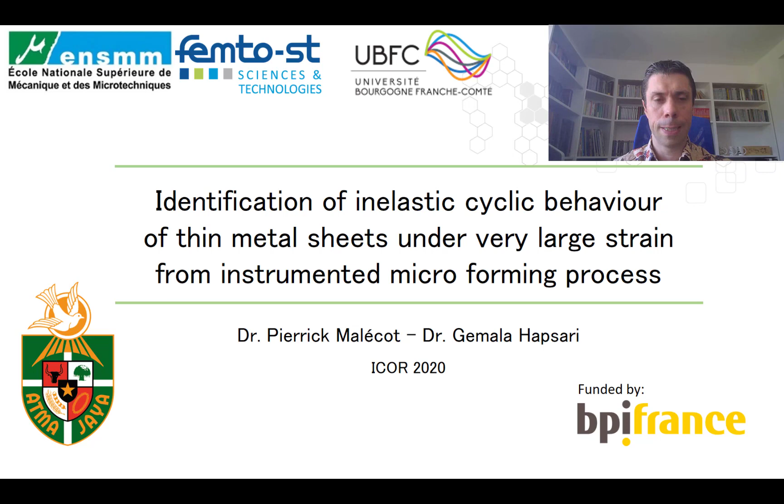Maybe a few words about the place I work in. The school is called ENSMM, the National High School for Mechanics and Microtechnologies. The school was founded in 1902. It's a French engineering school, what we call Grandes Écoles. This year we have around 900 to 1,000 students. It's not a lot for a university, but for an engineering school in France, it's quite big. If you need more information about the school, just check the website.

The research institute is called FEMTO-ST Institute. It was founded in 2004 by the fusion of 5 laboratories. It's a mixed research unit between the National Center for Research, the Engineering School ENSMM, the University of Bourgogne-Franche-Comté, and the University of Technology in Belfort-Montbéliard. Around 800 people actually work in the FEMTO-ST Institute.

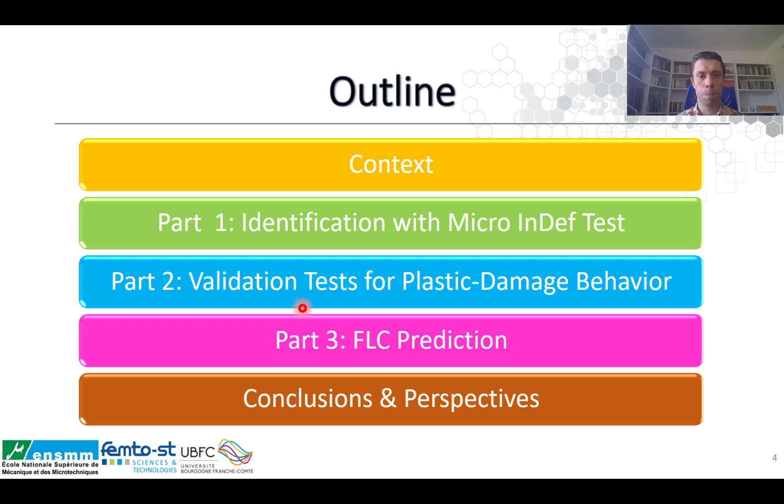This work is the fruit of a research project between 2 laboratories and 6 companies with a budget of nearly 4 million euros. The main goal of this project was to develop a new type of connector which is cost effective and has high performance.

We work on the material characterization aspect, while the other laboratory, GRESPI, works on simulation and process modeling to simulate all the processes used during microconnector manufacturing, such as cutting, bending, forming, welding, etc.

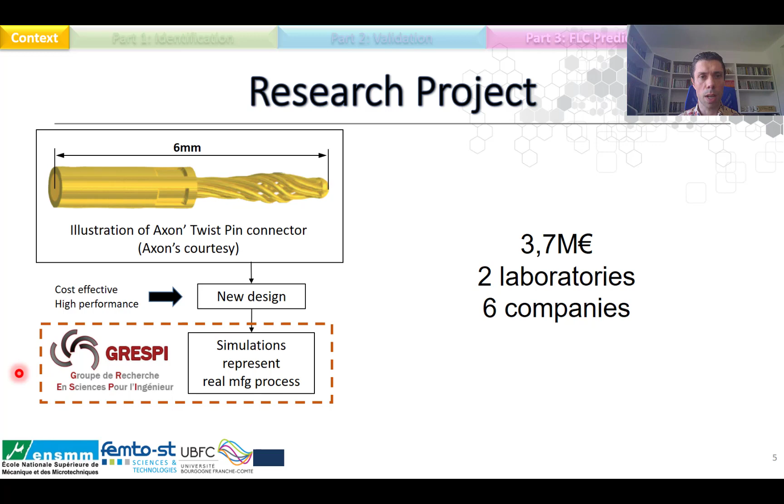As I said before, our work is to supply the suitable material parameters to GRESPI, and these parameters will be used to run process simulations. So we use some experimental tests to identify the material parameters.

Within this work, regarding the material, we have some limitations. We are working only with copper alloy strips, with a thickness of 0.13 millimeters and 15 millimeters width. They will go under very large strain, and we have the phenomenon of out-of-plane solicitations.

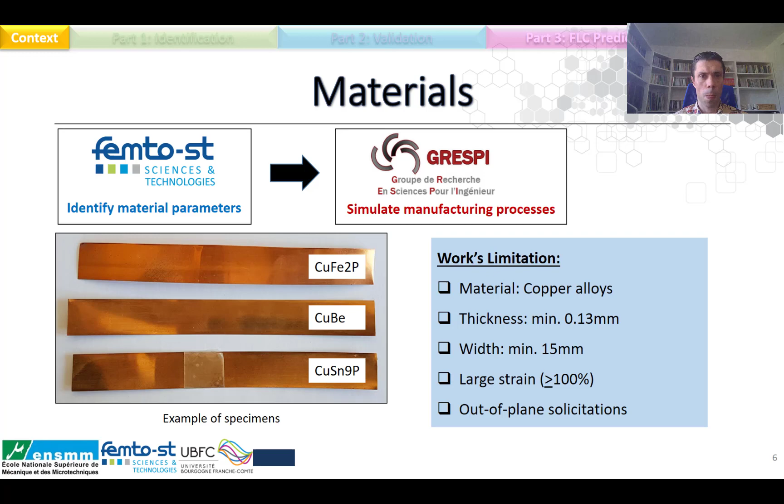As a quick recap of our mission: we have to identify the constitutive law of thin sheet metal adapted for process simulation. To accomplish this, we must face the challenges of establishing characterization methods for mechanical behavior and for formability of thin sheet metal.

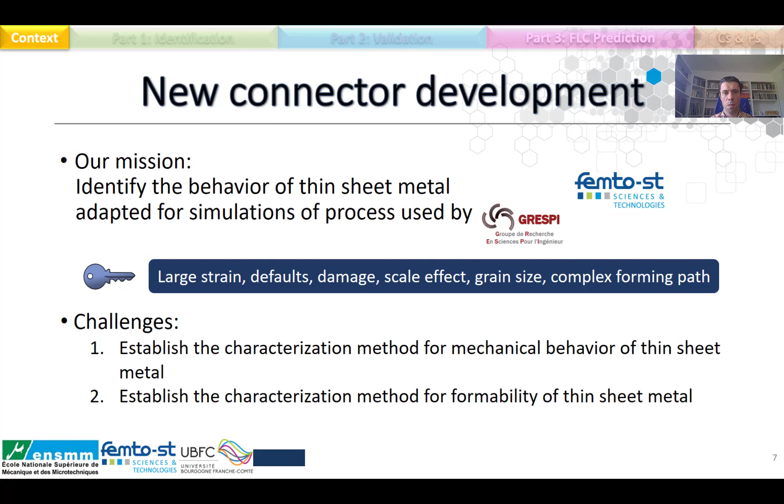Everybody knows that there are already several methods to characterize material. So why do we need to develop a new one? That's the object of the following slides. The most known experimental test is the tensile test.

Tensile tests have two main weaknesses for the work we are trying to do. The first weakness is that tensile tests undergo homogeneous and plane deformation, and the maximum strain for copper alloy is rarely above 50%. This doesn't match the requirements we have for our characterization, which is out-of-plane deformation with maximum strain above 100%.

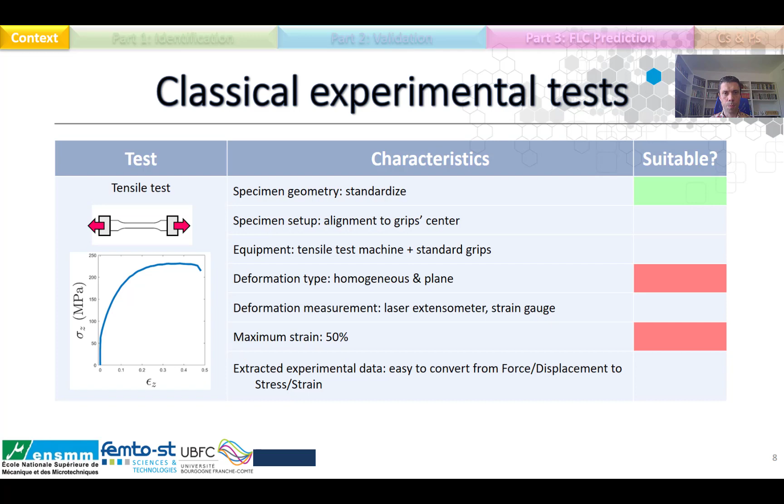We also used some bulging tests, but as our strips are very small, we need to develop a new setup for this experiment. The size is very small, so the sealing will be very hard to obtain to ensure the pressure, and in copper alloys the maximum strain is just around 70%.

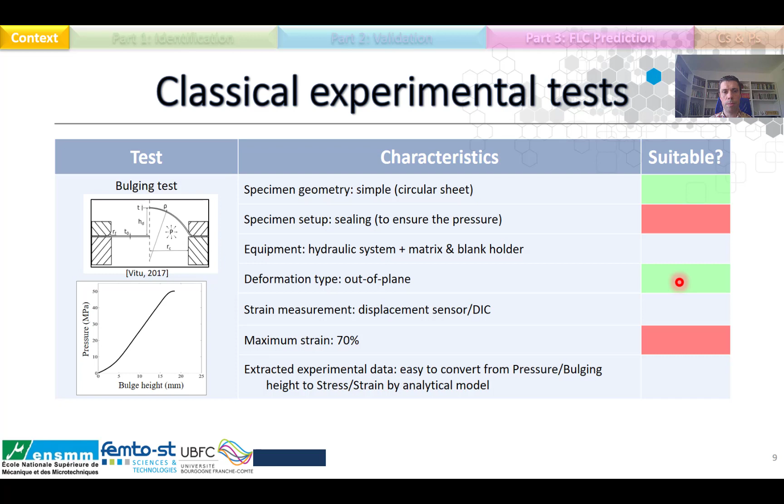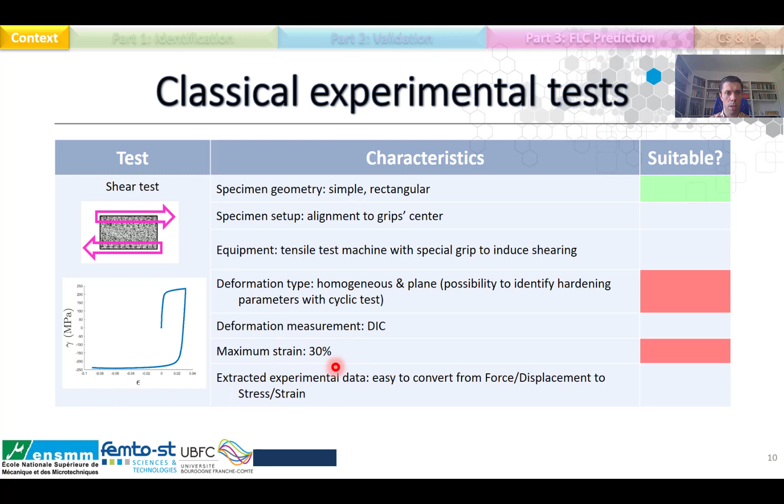So we developed a new type of characterization test. The name of this new characterization test is micro-indef, for micro-incremental deformation test. This test has a lot of advantages. The geometry of the specimen is very simple. We can go under a heterogeneous and out-of-plane deformation type, and the accumulated strain is above 250%, which is very high. So this test matches the requirements of the project.

We can go under out-of-plane test. We can go above 100% deformation. And as the specimen geometry is simple, it's easy to manufacture them in a very small strip.

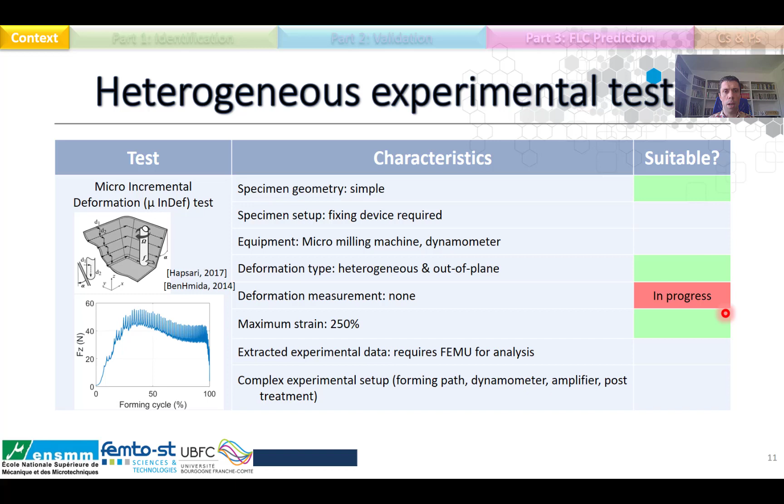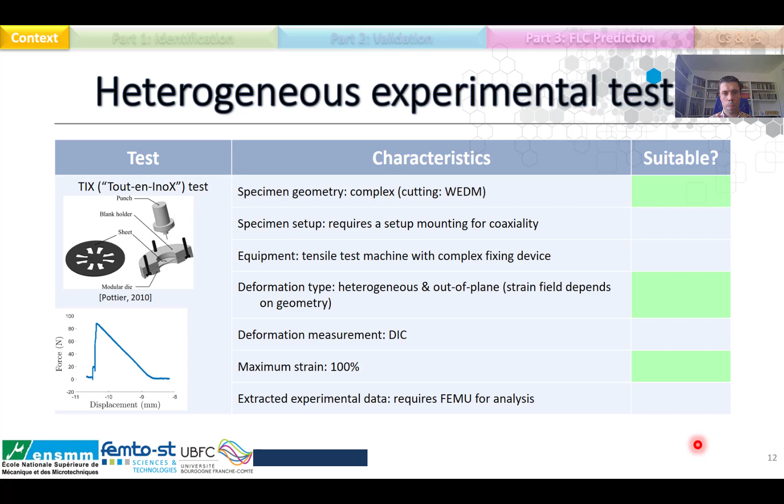So this table sums up all the qualities of the different experimental tests. We can see clearly that micro-indef test and TIX test are capable of answering our needs. So I will firstly present micro-indef test as the characterization test, and later we will talk about TIX test as a validation test and as a potential candidate for material characterization methods.

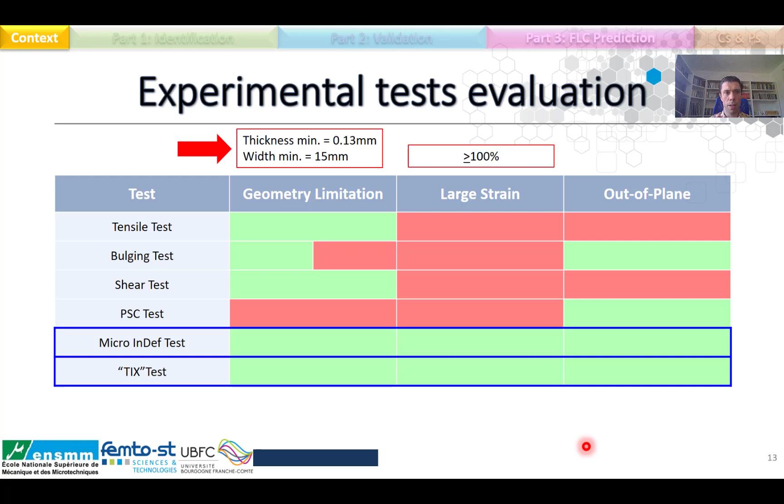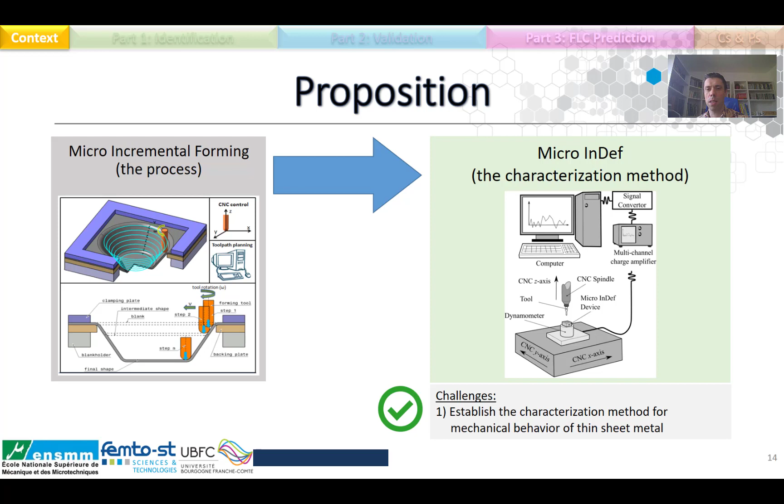As I have shown in the previous slide, classical characterization methods didn't fit all the requirements we have for this project, but micro-indef test did fit all of them. So we propose to use micro-indef test as a characterization method. Micro-indef test is inspired from micro-incremental sheet forming. The first part of this presentation will explain the identification method, and will show that the results we obtain with this method are reliable.

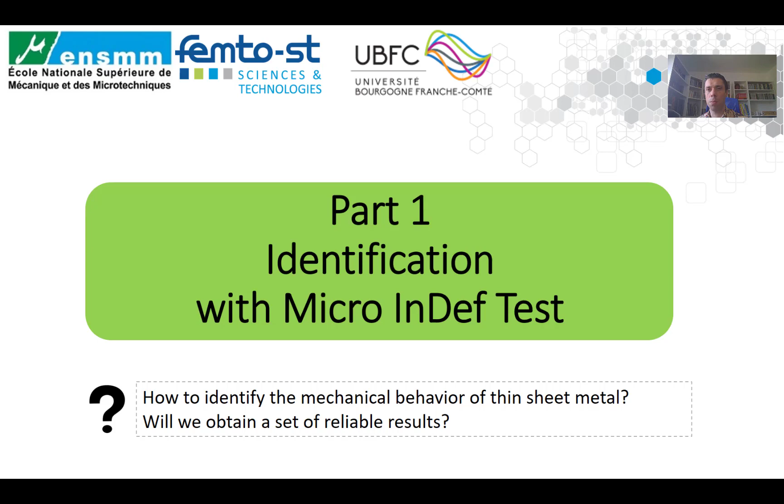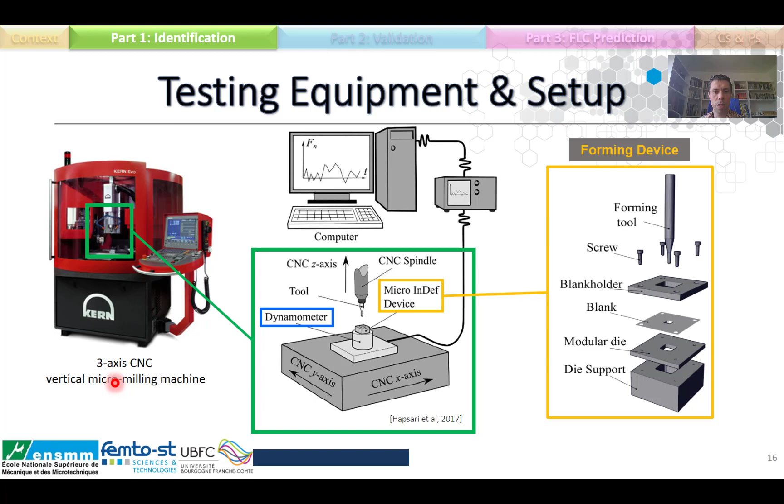Micro-indef test is performed on a micro-milling machine, like this one we have in the laboratory. During the test, the forming forces are measured with a dynamometer that lies below the forming device, and the forming forces are recorded by a computer. The forming device itself consists of a die support, a modular die, and a blank holder. The sheet metal here is placed between the blank holder and the modular die. So to ensure the immobility of the blank during the forming, 4 screws are used to fix the blank holder. The micro milling machine we use is very accurate. It's a Kern Evo, and the repeatability of the machine is 1 micrometer, and the precision of positioning is 0.1 micrometer.

So the geometry we use for the characterization test in this project is a tiny pyramid, as you can see here. The geometry we use for this project corresponds to the width of the strip. So the pyramid has an area of 3 mm by 3 mm with 2 mm height. The forming tool has 1 mm diameter. The lubrication with oil is sprayed directly on the blank on the tool during the forming.

And we used several trajectories. So the forming strategy chosen here is constant Z level, meaning that within one forming cycle, the tool forms the blank at a certain height until it returns to the starting point, and after that it goes one step under and follows the path for the next level, and so on until the end of the trajectory. So one forming cycle lasts around 30 seconds.

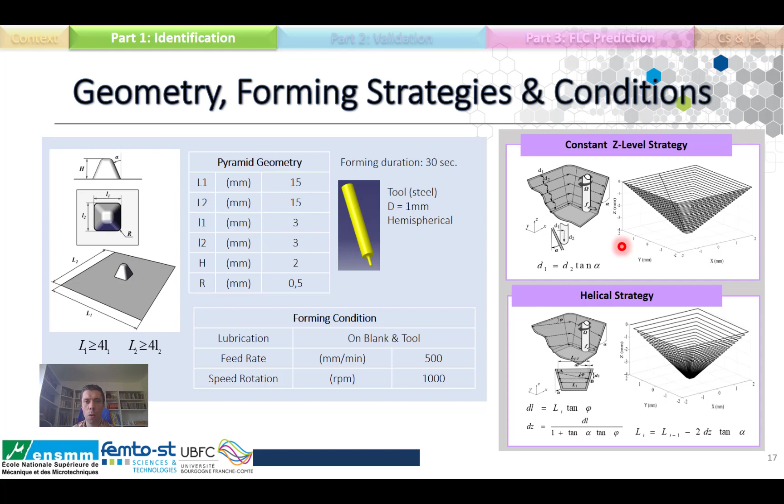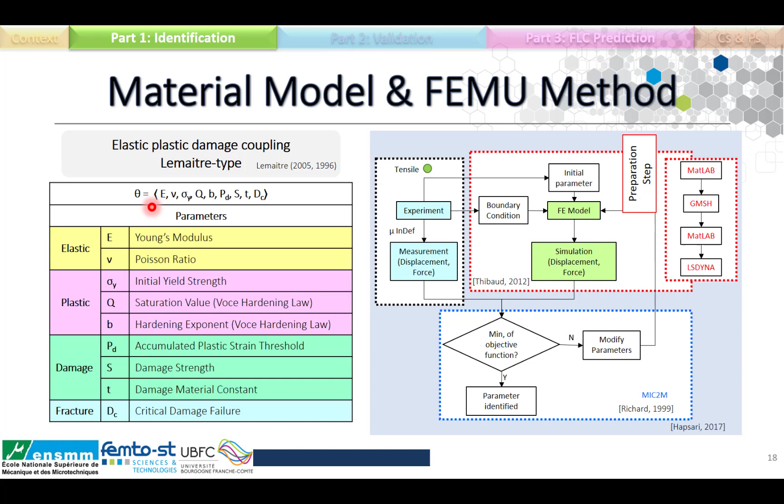When this difference is minimized, theoretically we obtain the material parameters.

The first step in the identification procedure is the initialization step. From the experimental tensile test, we obtain the elastic and plastic parameters. So it's here.

Next, this parameter will be used as the initial input for a tensile test simulation. With a homemade toolbox for optimization called MIC2M, the value of each parameter is modified to achieve the one with the least difference to those of experimental tests.

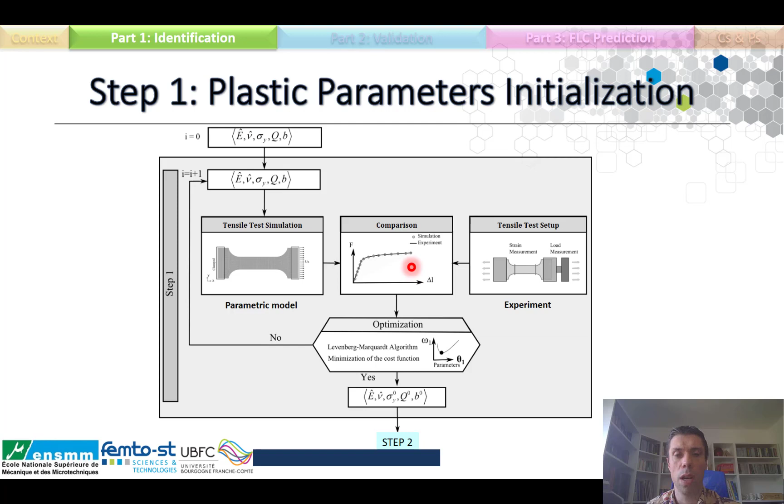When we arrive at this, it means we have the suitable set of parameters to be used in the second step, which is the identification step. From the identification by tensile test, we now have the elastic and plastic parameters.

However, we still need the damage and fracture parameters in order to start our identification. These damage and fracture parameters are obtained from the literature. So with this set of parameters, we can perform our micro-InDef simulation, and thus we obtain the numerical forming forces.

As explained before, by performing a micro-InDef experimental test, we obtain the experimental forces.

In the same manner as we did on the tensile test identification, we use our optimization toolbox to achieve the parameter values which have the least difference between the simulation and the experimental ones.

To make it simple, we have the forming forces from the numerical simulation and the forming forces from the experimental test. We compare both, and using the optimization toolbox, we look for the least difference between the experimental and the simulation forces.

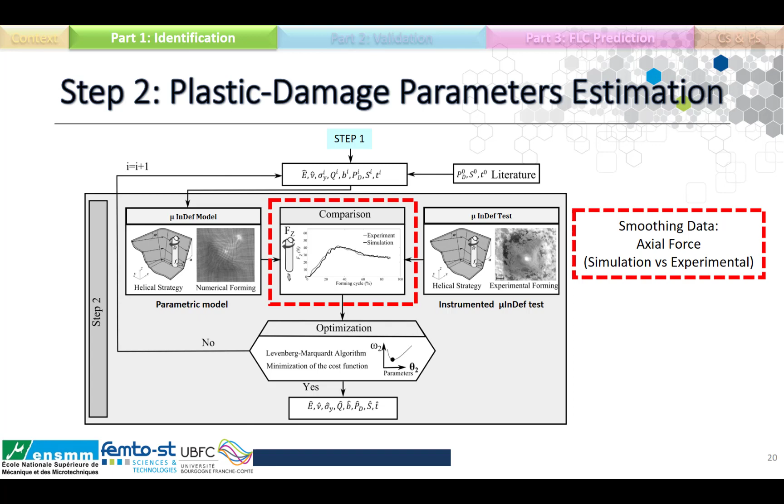The identification procedure computing time is quite big. We use a cluster computer with between 16 and 20 processors, and the whole calculation takes around 5 days.

Within this research, we have identified various copper alloys such as beryllium copper, brass, and copper iron, often used in electronic industry. The first set of results presented here are for copper iron, obtained from identification with micro-InDef methods. The graph on the right compares the results between experimental tests and the simulation obtained from micro-InDef.

This validation set is realized with a helical path to form the pyramid, so it's not the same trajectory as the one used for the identification. The result is quite good, as you can see the forming forces are very well predicted.

We can note here that phi represents the number of grains in thickness. We will talk about it later.

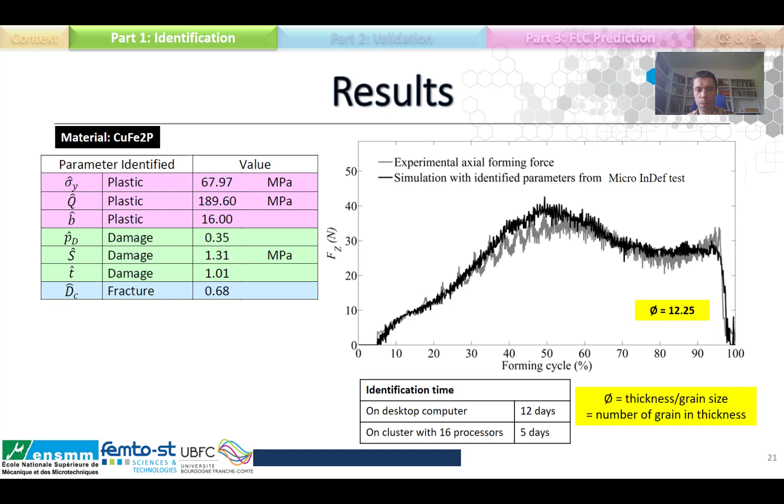Now we have the identified parameters. The question is, do we have the good ones? Are we sure these parameters are not just some value from mathematical fitting? If they are, then our chosen method is not good to validate the constitutive model.

Another question we can ask is, do we really need to use a micro-InDef test instead of just a tensile test to obtain these parameters? The first step to answer these questions is to be sure that the forming forces, namely Fz, depend on the material parameters, which means with the modification of material parameters, the forming forces will also be modified.

Therefore, we performed a sensitivity study on parameters from the Lemaitre model. The graphic shows that the micro-InDef Fz is sensitive equivalently to all parameters. As you can see here, all the black graphs have the same height.

While tensile force is sensitive to plastic and elastic parameters, it is not sensitive to damage and fracture parameters, at least not very sensitive. Moreover, the sensitivity of tensile force is lower overall for all parameters.

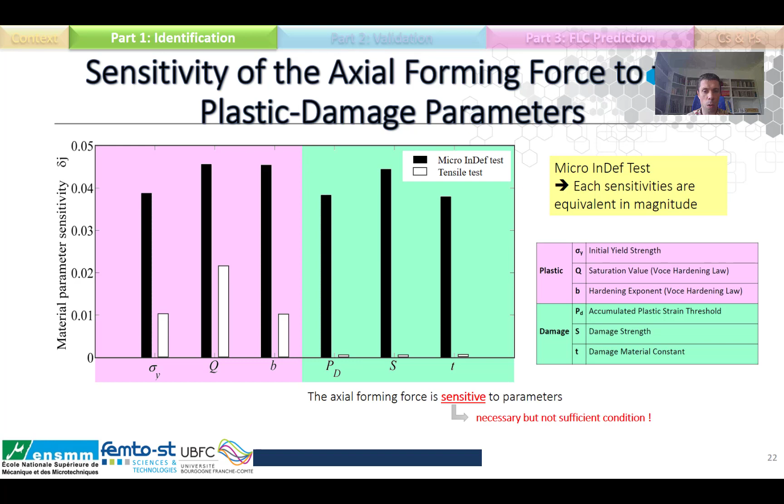Knowing that axial force is sensitive to parameters is necessary, but it's not a sufficient condition for parameter identification. The information richness contained in the forming force should be quantified with an identifiability index.

Identifiability determines if there is enough information from forming force to identify the constitutive law. This criterion is based on the work of Richard. If the criterion is lower than 2, it means the parameters can be identified. If it's higher than 3, then they are unidentifiable.

If we check the micro-InDef test with the black graphic, we can see that with all parameters, the identifiability stays under 2. That ensures the identifiability with forming forces obtained from the micro-InDef test is the good choice. As you can see, it's possible to identify plastic parameters with the tensile test. It's no longer possible to use the tensile test to identify the damage parameter because the identifiability factor goes beyond 3.

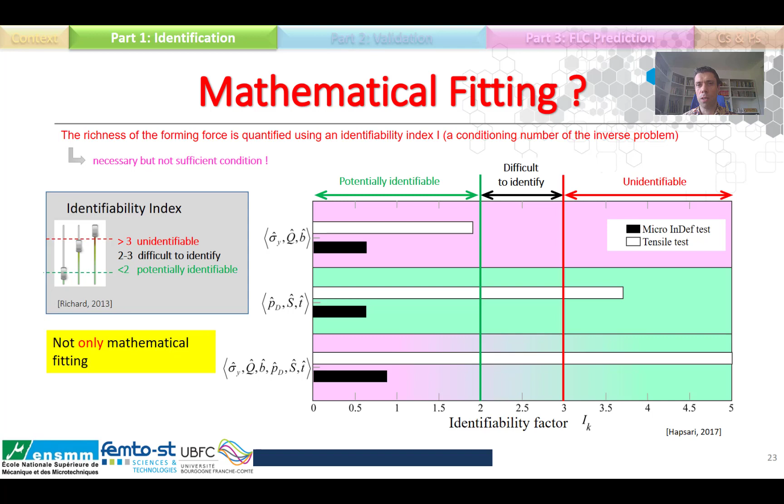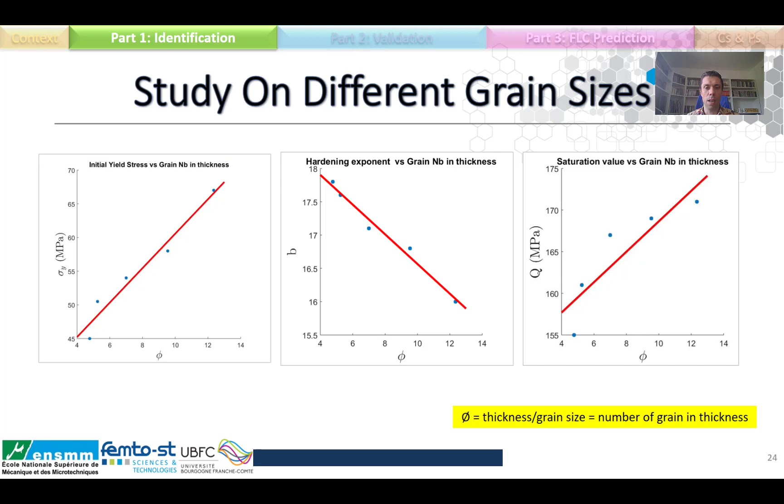I don't have time and I don't want to develop some mathematical calculation here, but we can just note that the identifiability index is based on the calculation of the Jacobian matrix. This study has also been realized on different grain sizes, which means that we use different phi ratios. And with the micro-InDef test, we obtain a set of parameters for each grain size. Evolution of some parameters with phi is represented with this image. For initial yield stress, we found a typical Hall-Petch type law, which means that the elastic limit has a variation with the inverse square root of the grain diameter.

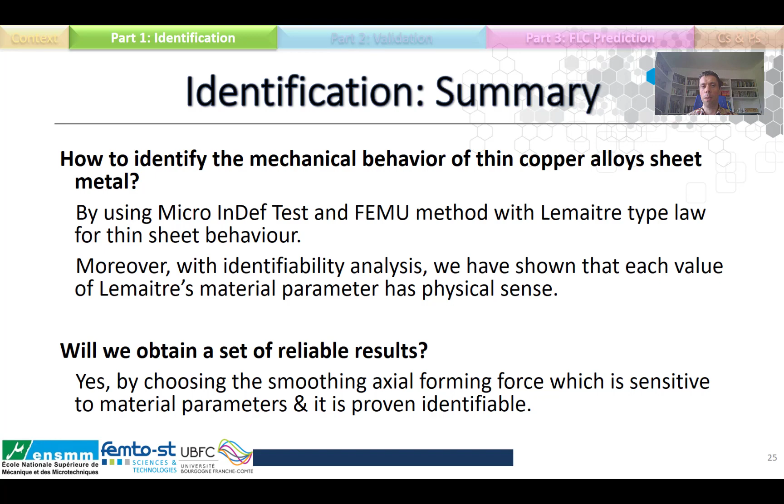At the beginning of this part, we had two questions. The first one was how to identify the mechanical behavior of thin copper alloy sheet metal, and the second one was, will we obtain a set of reliable results? The answer is that we can identify the mechanical behavior by using the Micro InDef test and the FEMU method with a Lemaitre type law for thin sheet behavior. And moreover, we have shown that each value of the Lemaitre material parameters has a physical sense.

Now that we have identified our material parameters and developed a method to prove that they are not just a mathematical fitting, but that they have a physical sense, we want to use these parameters in other kinds of simulation to prove that they can simulate other tests. As we explained before, phi is the ratio between thickness and grain size. So phi represents the number of grains in the thickness. The first validation test we try with the parameters identified by Micro InDef is simply a tensile test, but on a different grain size.

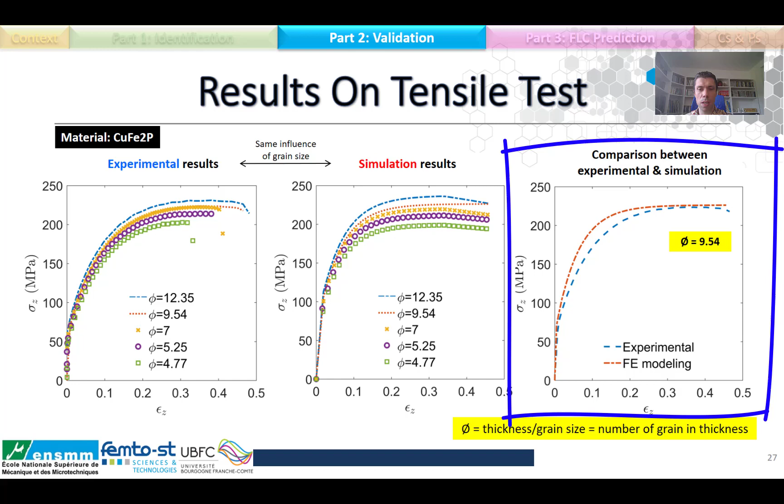The quasi-static tensile test is performed with an electromechanical MTS machine. The strain measurement is done by a laser extensometer and digital image correlation. To ensure repeatability, each test was repeated 3 times for the same grain size. The experimental results show a dependence of the mechanical behavior on the grain size. The finite element simulations are realized by using the material parameters obtained from Micro InDef tests for each grain size. The simulation results show the same influence of grain size as the experimental results. By visual comparison to the experimental graph, the result obtained from simulation is coherent. For example, here for phi 9.54, the difference between both graphs is less than 5%.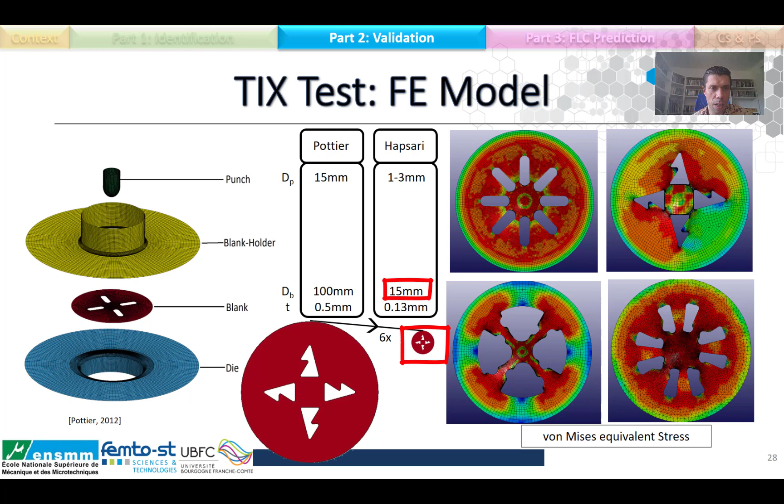For the experimental part, with the downsizing of the TIX setup, we are facing some difficulties. First, the alignment is hard to obtain. The alignment between the punch and the experimental setup, considering that the punch is fixed to the crosshead of a tensile test machine, and the setup is fixed on the fixed part of the tensile machine, is not good enough, especially with very small blanks. I forgot to say that the diameter of the blank here is 15 millimeters maximum, because the strip is 15 millimeters. Furthermore, with the small size of our blank, we need to greatly magnify in order to observe the strain evolution clearly.

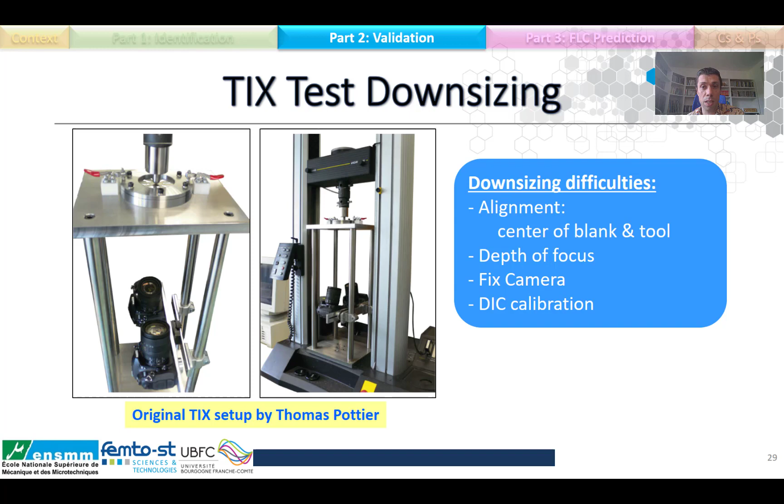So this generates different problems: a very limited depth of focus, and a requirement of having the camera completely immobile to avoid capturing blurry images. And we have exactly the same problem of focus depth and blurry image when we have to calibrate the DIC system. So after some tryouts, we have designed and manufactured the system as you can see it here. This system resolves all the difficulties we have encountered.

For example, for the alignment between the punch here in yellow and the blank, the punch is no longer fixed to the tensile test crosshead, but to a column system with a counter spring. For lighting optimization, LED spotlights are adjustable independently of the camera. The cameras are fixed on the lower part of the setup here. And to resolve the last problem, which is the focus depth and blurry image, we use new lenses and we optimize the distance between the camera and the specimen.

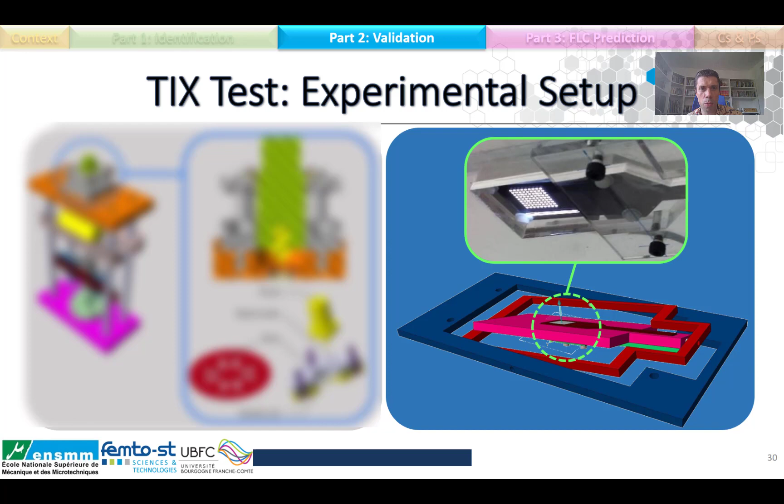The last point is to ensure the calibration. So to ensure the calibration, we use 15 by 15 targets with backlight. This target is positioned within a calibration system, which enables us to keep the target center immobile while having the degrees of freedom necessary to make the calibration of the DIC system. So these images show the final testing system. The specimen is here. The specimen is produced by wire electric discharge machining, and the speckles are applied to be used by a stereo correlation system.

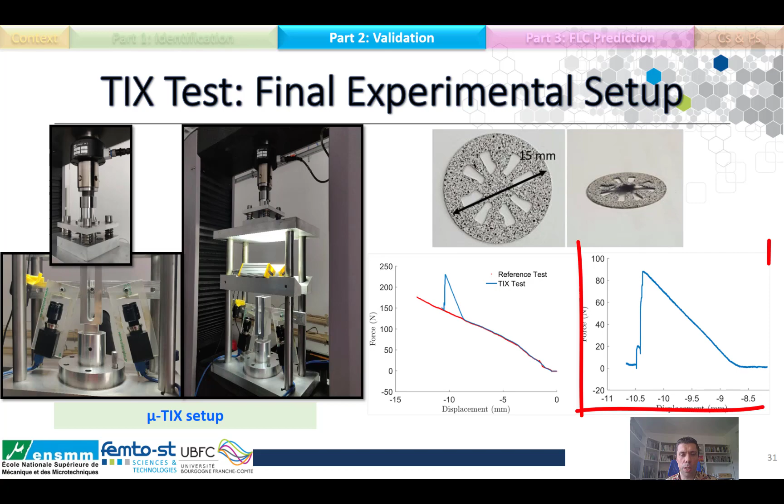To measure the punching force, we have to take into account the spring force. So the reference test is illustrated in the graphic. We first made a test without a specimen to measure the counter spring force, and then we conducted a normal test with the specimen in the system.

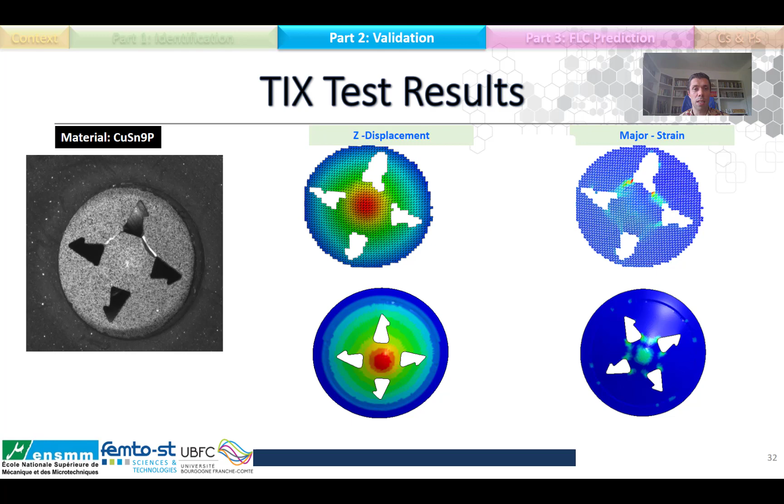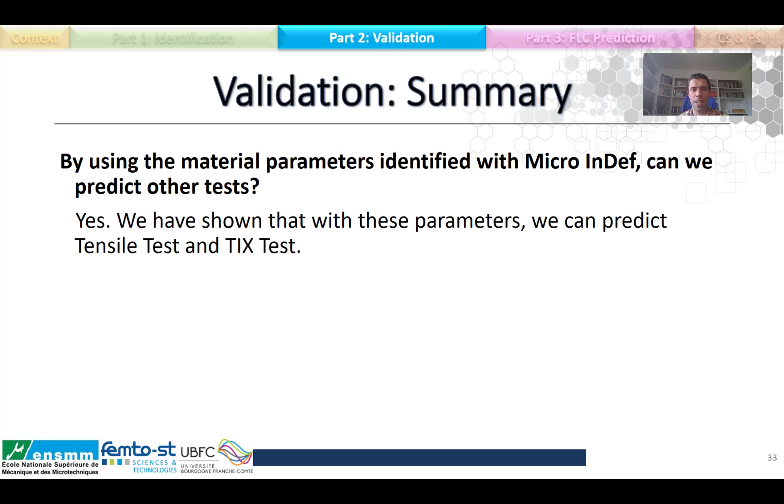The question asked at the beginning of this part was, by using the material parameters identified with Micro InDef, can we predict other tests? The answer here is yes. We have shown that with these parameters, we can predict tensile test and TIX test. And I can add that we have a lot of other validation tests that I don't present here. So the last part of this presentation is the prediction of forming limit curve with identified parameters.

Within the industrial framework, the concept of formability is necessary to define if a part is manufacturable or not. In macroscale, the forming limit curves are used to serve this purpose. But the question is, is this approach applicable for microscale? And can we obtain a reliable experimental FLC? The second question is, by using the parameters obtained with Micro InDef tests, can we have a numerical prediction of the forming limit curve?

ISO 12004 takes care of the determination of forming limit curves for metallic material sheets and strips, to be precise. It also recognizes two experimental methods to obtain the FLC: the Marciniak and the Nakazima method. The standard covers the rules for geometry of the testing device and for the strip thickness. Unfortunately, the rules don't cover our sheet very well, because the standard specimen thickness has to be between 0.3 and 4 millimeters, and the punch diameter from 75 to 125 millimeters, and our copper alloy strip thickness is between 0.13 millimeter and 0.21, with a width of 15 millimeters or 30 millimeters maximum.

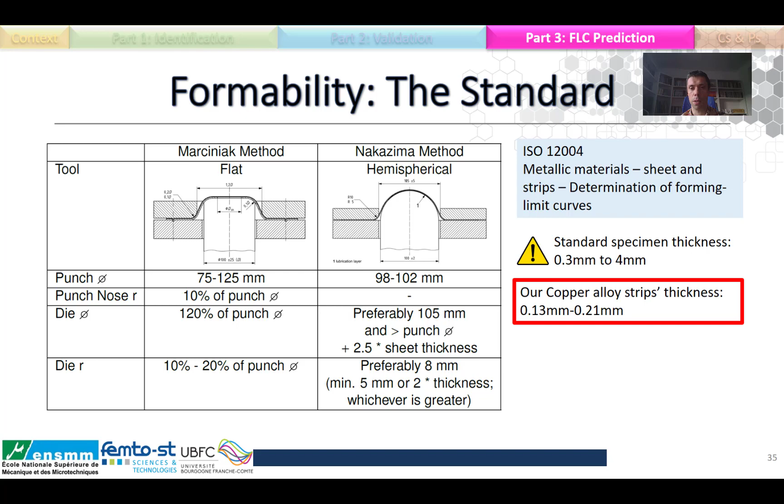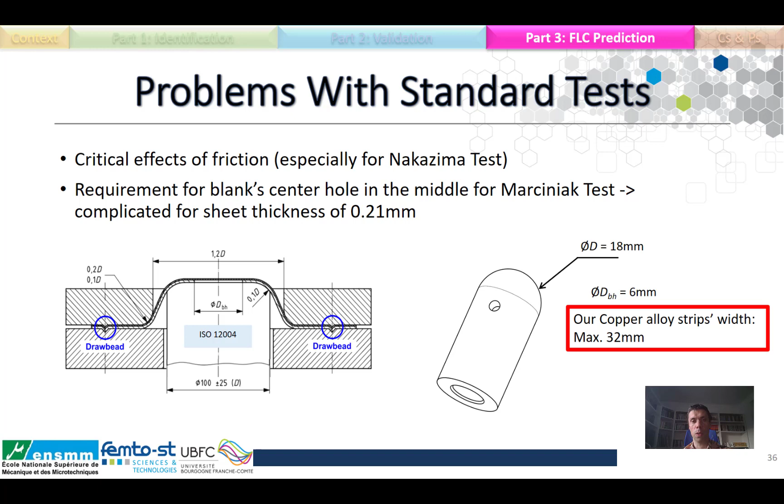When miniaturizing the standard test to our scale, we were facing some difficulties with the tests proposed. For example, the importance of friction is greater in microscale, especially for Nakazima tests. And to perform a Marciniak test experimentally, the difficulty is to achieve the blank sub-thickness size that corresponds to our strip thickness. That's why we chose to use the Marciniak test for simulation, because we don't have the problem of manufacturing the sheet. But for experimental tests, we use Nakazima.

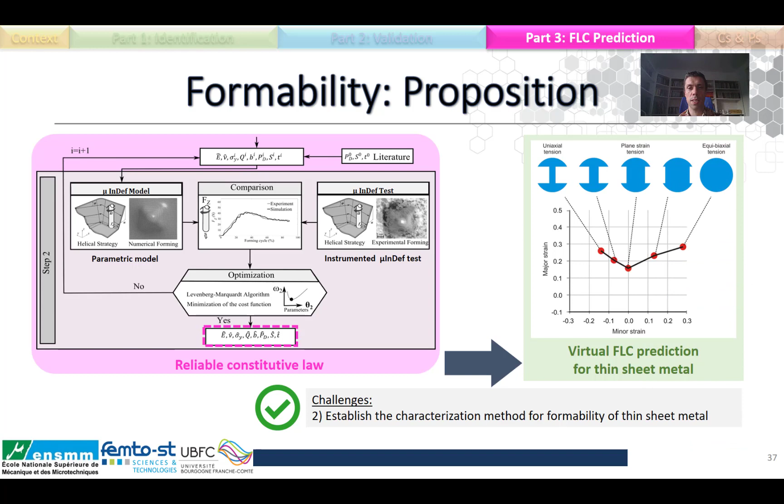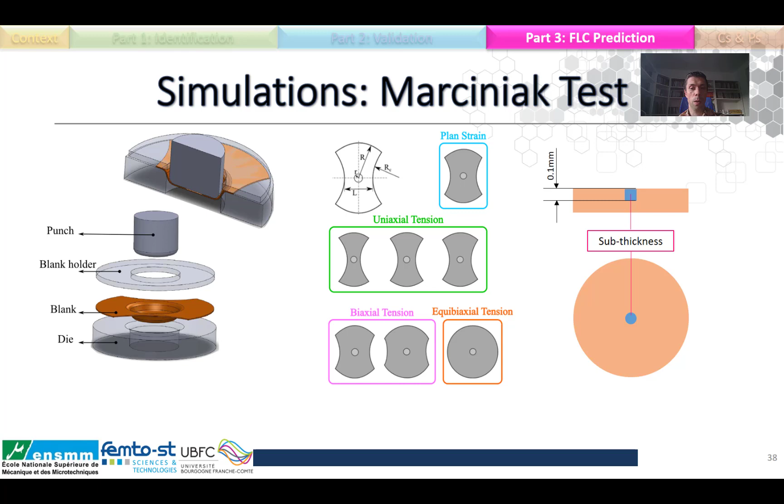So the idea here is to use the material parameters obtained by micro-indef test as a way to achieve the forming limit curve numerically. As I explained before, the choice of method for simulation doesn't fall on Nakazima because of the importance of friction in comparison to Marciniak. For this simulation, we use 7 different geometries. To ensure the deformation localization, a thickness reduction of 0.1 mm is placed on the center of the specimen in order to have a non-uniform thickness. These simulations are performed for different grain sizes using the material parameters identified by micro-indef.

The experimental Nakazima test is performed at Institut de Recherche Dupuy de Lôme in Lorient under the supervision of Professor Pierrick. This test is performed on a Zwick Roell sheet test machine, and the tests are performed on 8 different geometries to observe the deformation from uniaxial tension up to equibiaxial tension in order to obtain the complete FLC.

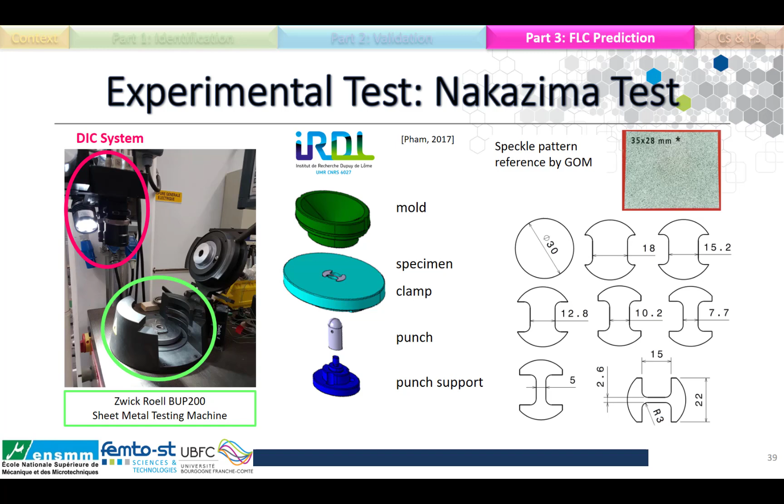To observe the deformation, we use the DIC system and prepare the specimen with the advised speckle pattern. To minimize the friction between the punch and the sheet, we use a Teflon strip on the other side of the specimen, while on the punch we apply a generous amount of oil.

The photos on the left of the page show the fracture of different geometries. We can observe on some specimens that the fracture doesn't take place in the middle. On the right, we have the forming limit curve we obtained with experimental work.

We can note that the lower the phi, so the lower the number of grains in the thickness, the higher the formability. In order to obtain this forming limit curve, we were obliged to follow step by step the ISO 12004, and we developed our own algorithm under MATLAB.

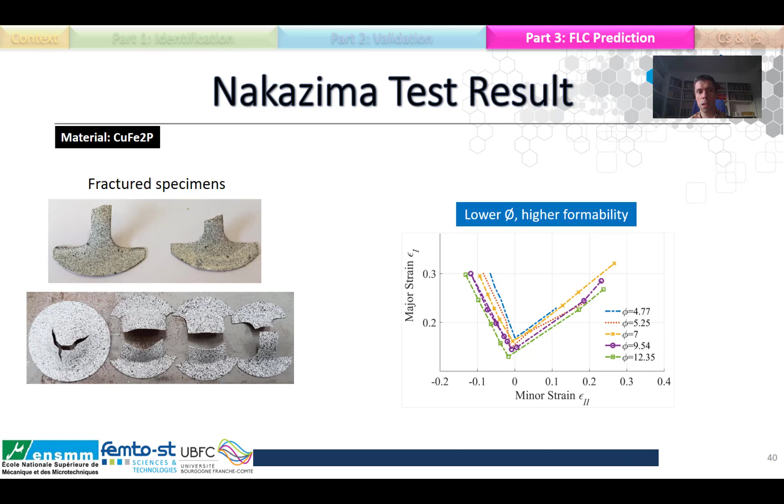Because of the size of our sheet, we cannot use the automatic forming limit curve algorithm in the Aramis software. So on the left side is the result of simulation using the Marciniak method with a friction coefficient of 0.05. It shows the same tendency as the experimental one: the lower the phi, the higher the formability.

On the right side, we can see the comparison of results between the numerical simulation and experimental. At first glance, it seems as if the simulation cannot predict the experiments correctly, because if you compare the yellow curve and the pink curve, they are far apart.

That's why we tried another simulation with a higher friction coefficient, 0.1, and this time you can see that the experimental curve and the simulation curve are in really good agreement. This result shows that we probably had some difficulty with friction during our experimental tests.

This problem is well underlined by the fact that some specimens didn't break in the middle. It's often a sign of high friction.

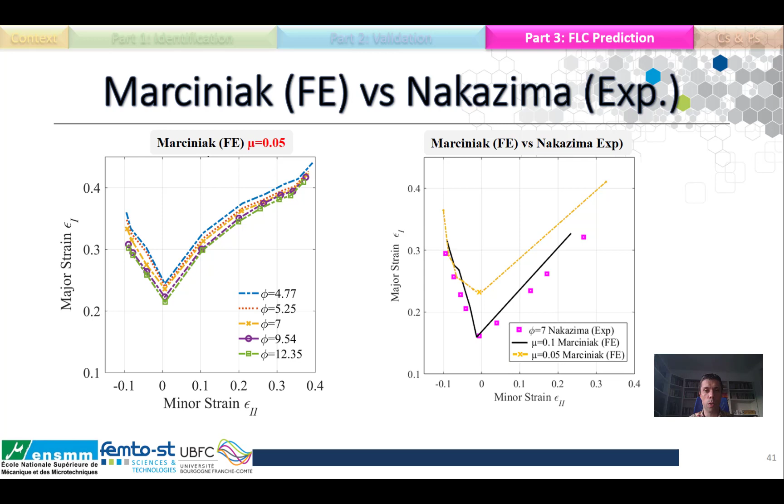So at the micro scale, we have proven that with material parameters obtained from micro-indef, it's probably more reliable to realize the FLC by numerical simulation than by experimental test, due to the great influence of friction during the experimental test. The question was, by using the material parameters identified with micro-indef, can we predict the FLC?

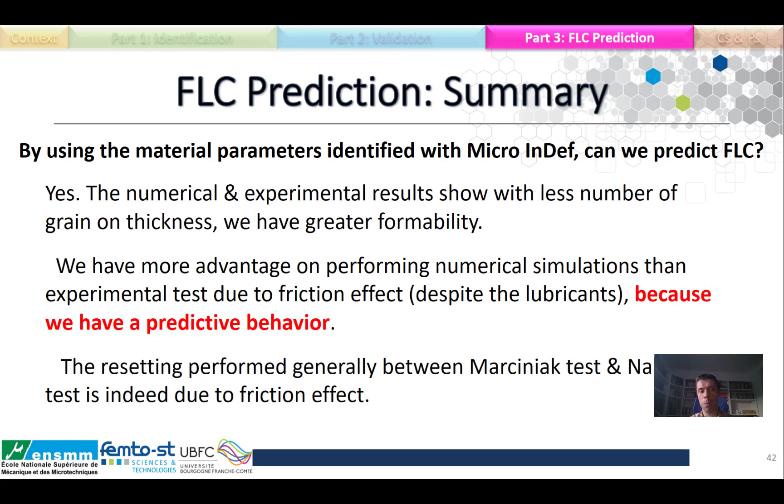To make it short, yeah. The numerical and experimental results show that we can predict with very good precision the forming limit curve for the copper alloys. So let's now finish with some conclusions and perspectives.

This work demonstrates that Micro InDef test identification to identify Lemaitre model parameters is not just a mathematical fitting, and that Micro InDef test identification is more suitable than other tests for these materials.

By using the material parameters identified with Micro InDef, we predict the forming limit curve with better reliability due to better friction control. And the numerical and experimental results show that with a smaller number of grains in the thickness, we have greater formability.

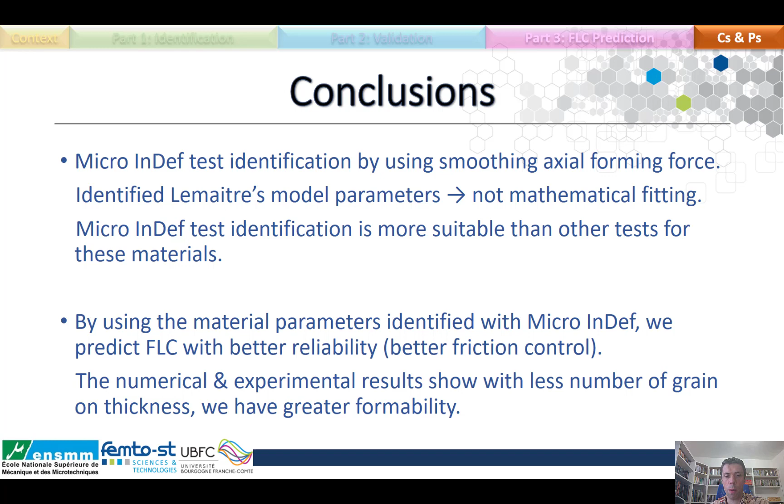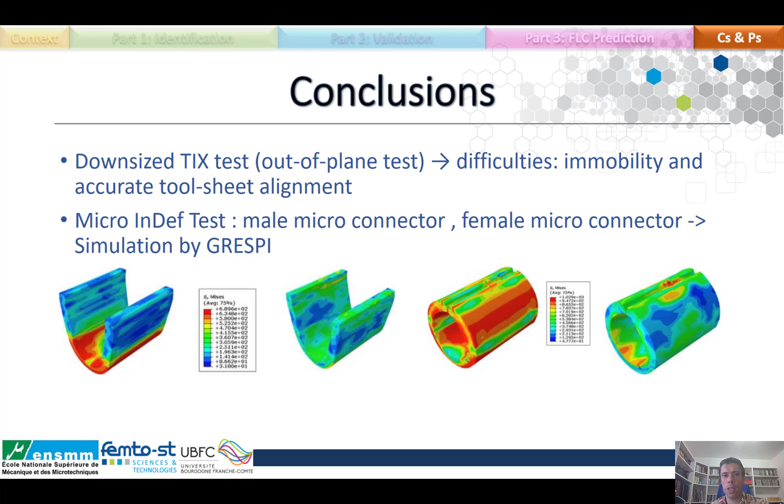So the Micro InDef test was used by our colleague from another laboratory to run some simulation of the process for a male micro connector and a female micro connector, as shown in this picture.

And the perspectives are numerous for this work. For example, we will try to use the TIX test as an identification test and not just as a validation test.

And we currently have a PhD student working on improving the Micro InDef test toolpath. We want to minimize the toolpath, for example with some NURBS curves, in order to reduce the computation time.

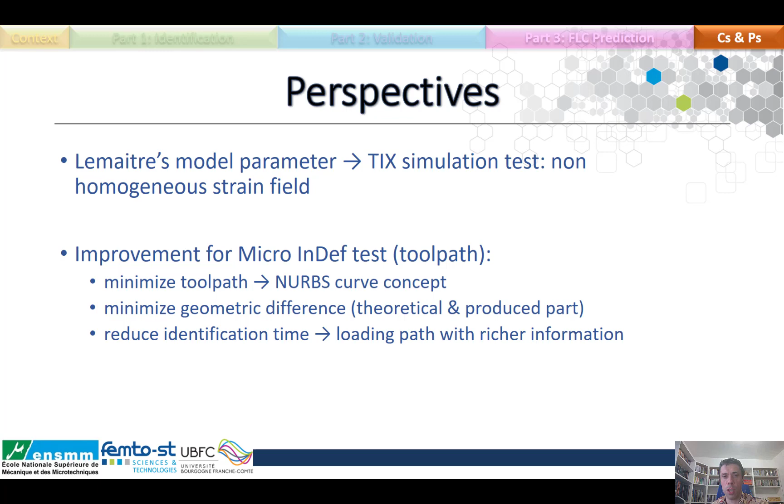We are currently working on the realization of an Indonesian traditional mask at a sub-millimetric scale. The part is produced with incremental sheet forming, and a simulation of the process is realized by finite element analysis using the material parameters calculated by Micro InDef.

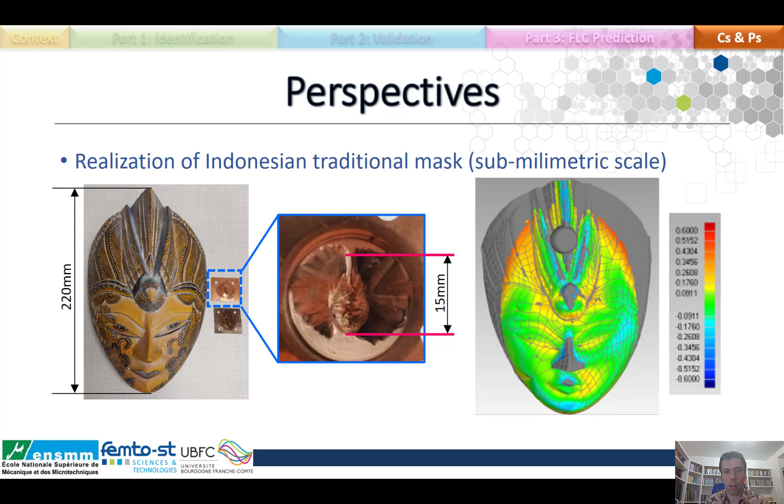Because the tool is too big to produce this thin part when the mask is very small.